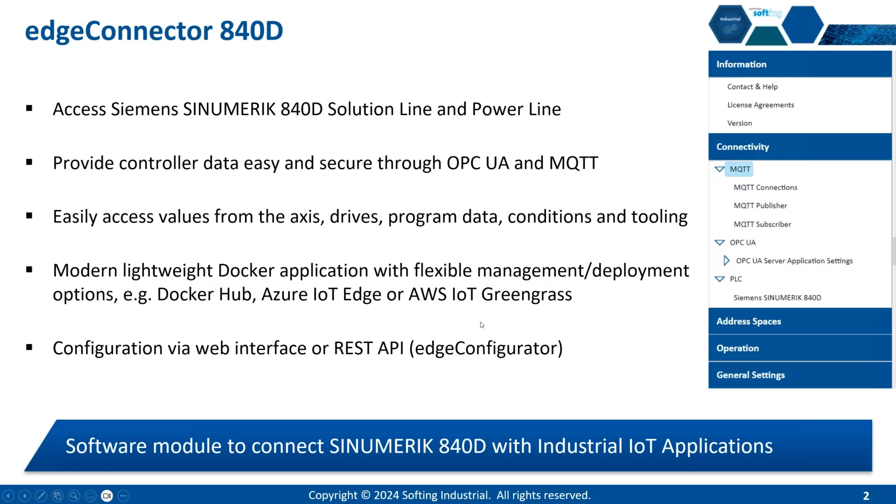Softing does not only have one edge connector, we have multiple edge connectors, each having a different source, like the Edge Connector Modbus, which is collecting data from Modbus PLCs. We also have one for Siemens, specifically designed for Siemens PLCs like S7 300 or 1500. And we also have one for FANUC CNCs. But as mentioned earlier, today we focus on the Edge Connector 840D, allowing you to access data from powerlines and from Sinumerik solution lines.

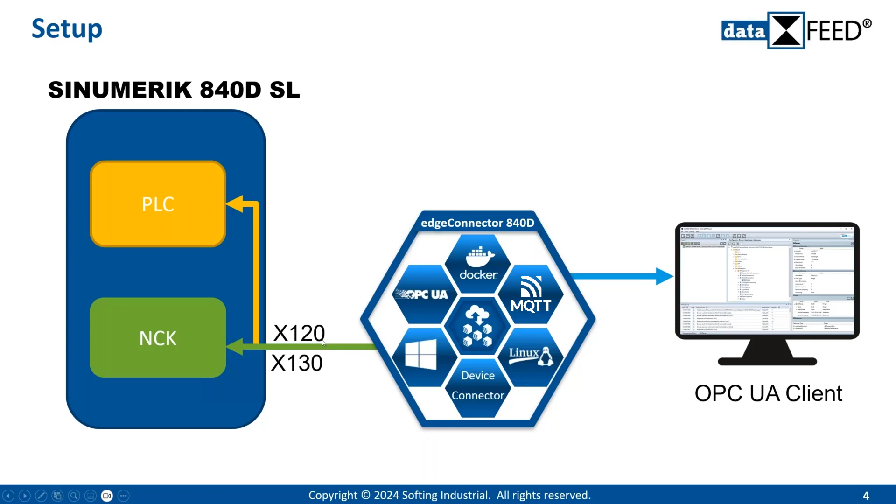Briefly, the setup explained. So you have the Edge Connector 840D in the middle, and by connecting to a Sinumerik solution line, which is the newer line from Siemens, you will have an Ethernet connection, and this is made via the interfaces X120, or you can also use the X130. If you use the X130 interface provided by the Sinumerik, please ensure that you enable the firewall port in the settings of the Sinumerik.

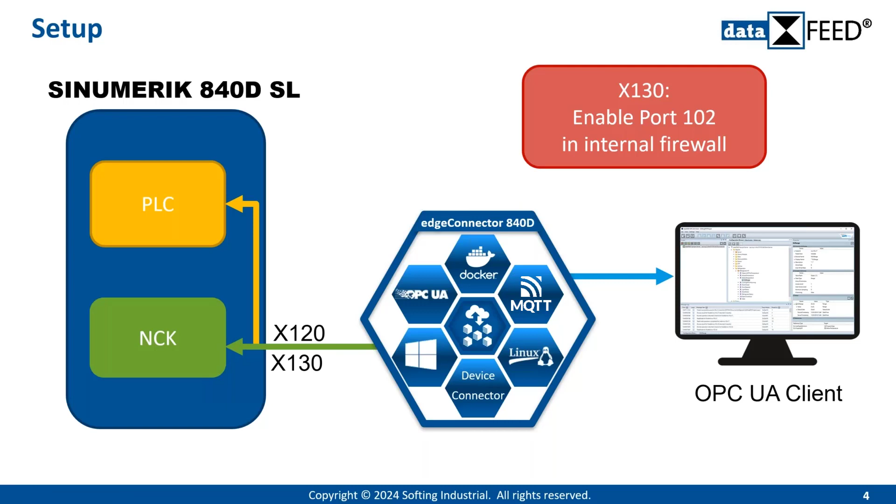This is how it looks in real life. So this is the X120, which I explained earlier, and this one is the X130. You can use both, but if you use X130, you need to enable the firewall. On the right side, you see a picture of it. X120 would be where the yellow cable is plugged in. X130 is where the white cable is plugged in.

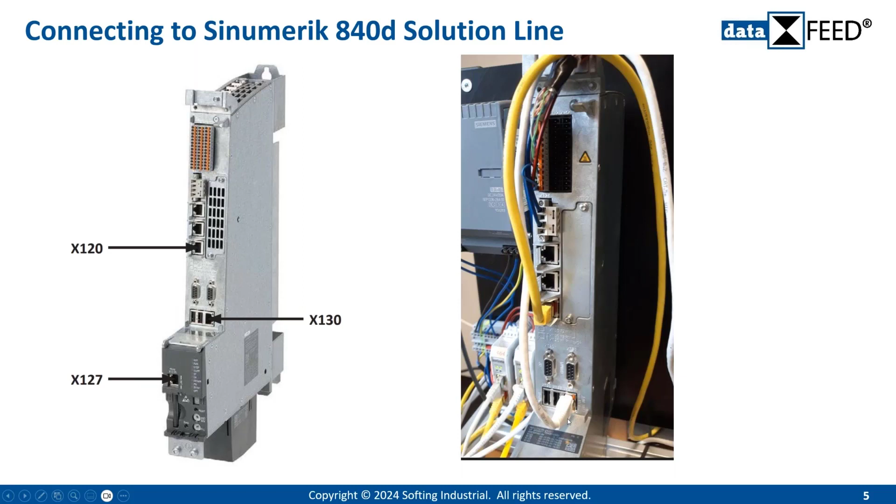When we speak about powerline, it is similar but not the same. Why? Because the powerline does not provide Ethernet. They just have serial bus communication because of the age of the powerline, which was mainly manufactured before 2005. So you need an adapter converting from serial to Ethernet. And Softing also provides a converter like this. This is called the NetLink. It converts MPI to Ethernet. To set up the NetLink, you just need to select the baud rate as 187.5 kilobits. That's pretty much it.

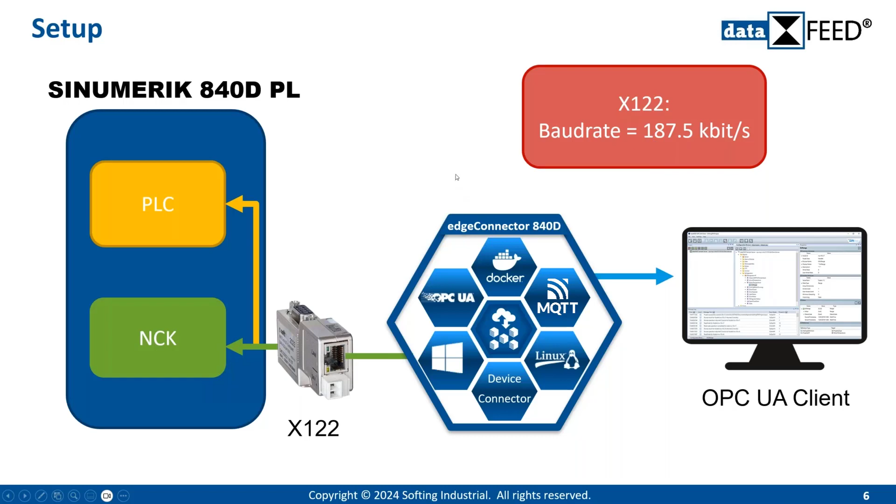The front panel of the powerline looks more or less always the same, but the X122, which we use for connecting to the powerline, is always on the same spot: it is right above the 8-digit display here. And once you have connected it, it looks like this. So you will also notice, as I mentioned earlier, there are no Ethernet communication slots here, so we need a converter from serial bus to Ethernet-based communication.

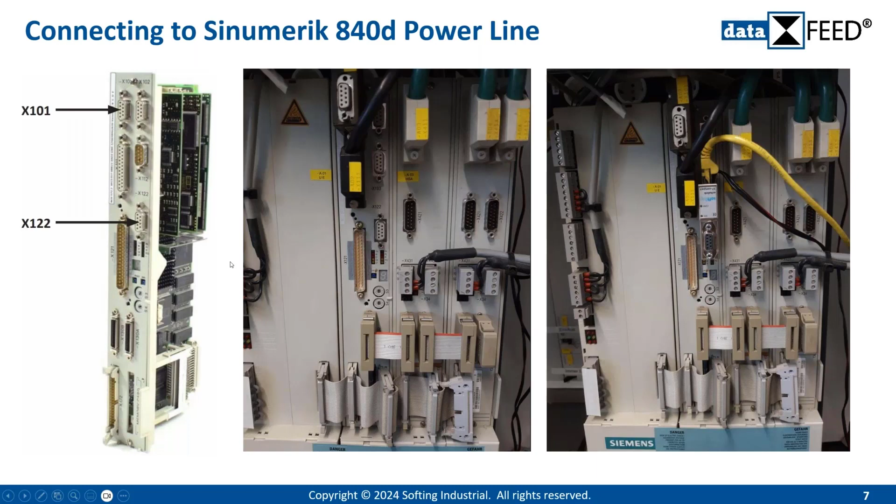How to collect the data? Maybe you know that the Sinumerik 840D, regardless of solution line or powerline, consists of two parts. There's one part called PLC, and there's another part, the NCK. Typically, customers want to access both. They want to have data from the PLC and also from the NCK. And we need to tell the Edge Connector 840D which data you want.

And this can be done via two different files. One is the SDFI file. This file is needed to access data in the PLC. And another text file, which has the naming AWL file. This is needed for accessing data in the NCK part.

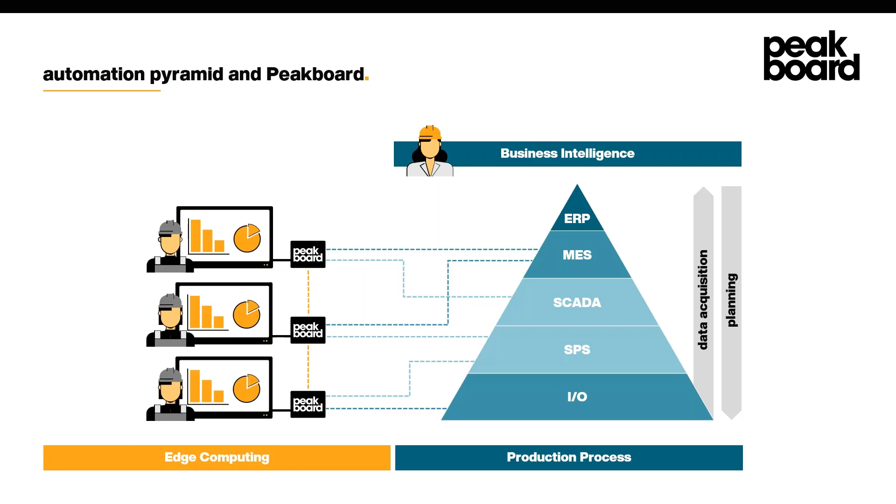This could, for example, be the edge connector from Softing, but this could also be, for example, an ERP system or whatever. And for that, we from PeakBoard can connect to all of the different data you have in your plant. So you can connect to your sensors, you can connect to your PLCs, SCADA systems, and so on. And when you did so, you can use our application to create, for example, a dashboarding or, what we can see here, a quality control.

So in that case, I just show you a small example of how people can collect quality data. Let's say they want to select which parts are broken and which parts are fine, to create data out of that, which makes you able to evaluate where you have problems, where you can improve. And that's what PeakBoard basically is. What we will do in a few minutes is to create this application. So we will create a dashboard overview where you can see the current state of your Sinumerik, but also how you can collect data from your workers to get an overview of your current situation in your plant.

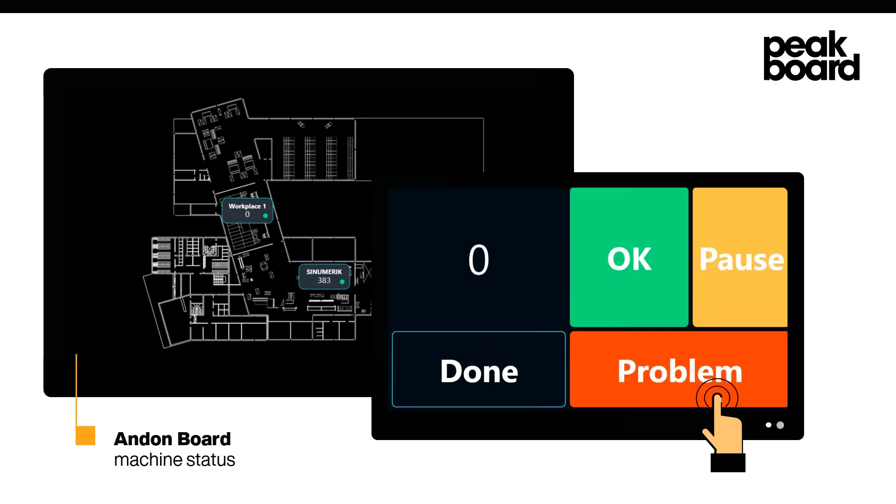For that, I will hand it over back to Stefan to start with the practical part. Thank you, Thilo. And I will start now with my practical part.

So I have already opened up my Edge browser, and I've entered the IP address and the port under which the Edge Connector 840D is running. I have to log in, and then I come to the landing page, giving me some useful information about the version installed and who I should contact if I need any help.

So the interesting part, because the time is limited, is the connectivity chapter, which is split again in MQTT and OPC UA. You can use both protocols, and for the connection made to the Sinumerik 840D, you simply enlarge the controller tab. And I will add a new connection to my Sinumerik 840D. I press this Add Connection button. I will give it a name like Solution Line.

And I want to establish connection to both, to the NCK part and to the PLC part. If you are happy with the default files, you can leave it as it is, but I have modified my NCK symbol file, and so you have to upload it. I simply choose file. I use that one specifically prepared for this webinar. I press open, and that's already it. Last thing I need to do is to enter the IP address of my Sinumerik, which is that one.

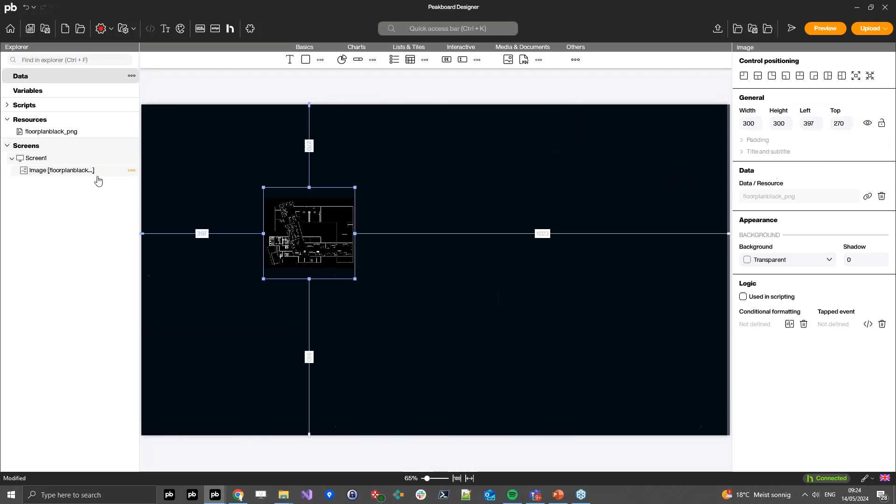And in our case, like shown before, we want to create this demo, this floor plan. So for that, I just start by adding the floor plan as a screenshot onto my Peakboard Designer. For that, I've just simply provided a PNG file, which I can just drag and drop from the File Explorer directly onto my screen. Click here on OK, and now I've just added a floor plan. So that's just where things start.

So the next thing I will do is first I will lock that so it doesn't annoy me anymore. I cannot click it now anymore. And the next thing I will do is now to connect to the OPC UA server Stefan provided from his Edge connector to get this Sinumerik data.

So for that, I firstly click here on data, add data source, and like you can see here from Peakboard, you can connect to a lot of different data sources, starting from REST APIs like JSON, XML. You can get data from SAP, databases, whatever, or different machine data, like for example here we have OPC UA. OPC UA is just the thing we want to use now.

So let's start with that, and first I give that thing a name, and we call this Sin1 for Sinumerik 1. This is the first of our Sinumerik machines, and firstly I will enter here the URL of our OPC UA demo server. Let's click here on endpoint reload. So like Stefan showed before, we have no authentication set, so I can just select anonymous. However, I need to select some kind of certificate. I can directly create it here, but I already did that.

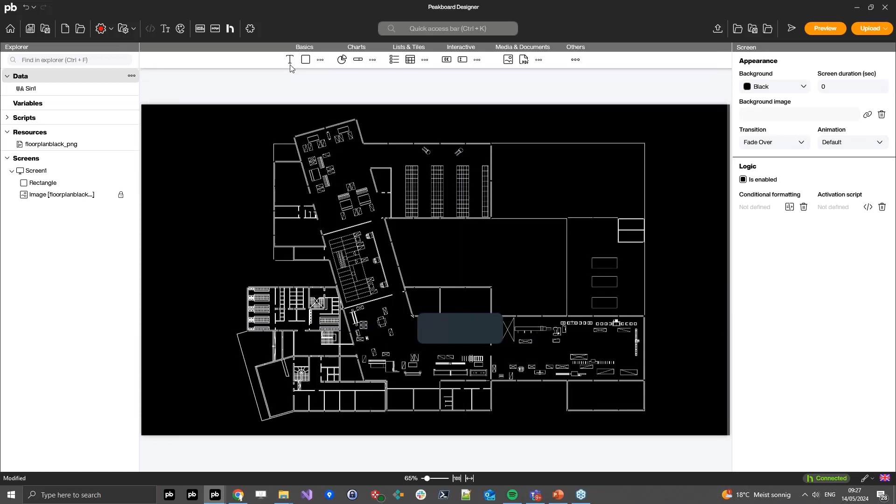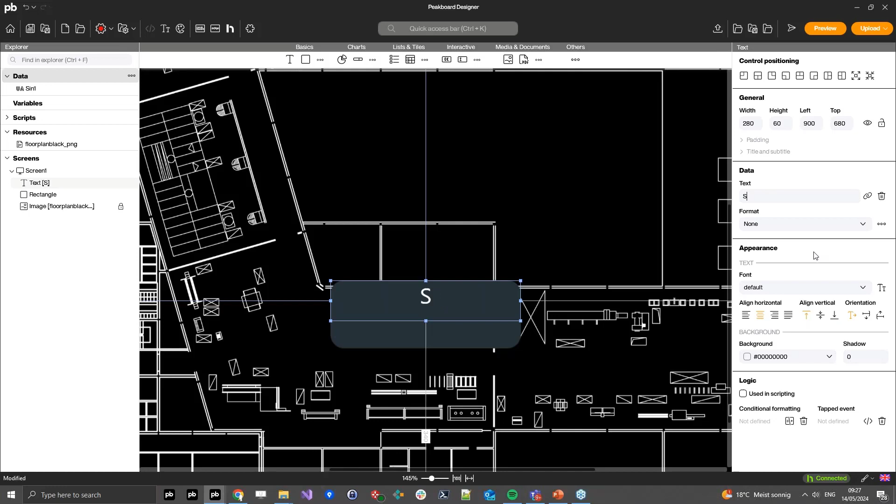So the next thing then is that I add a header for the Sinumerik. So for that, I just drag here from the top. Oops, I double click onto the rectangle, and I will just simply set the visual settings, like for example the position. I will call it Sinumerik, and just set the font here to header 2 in that case, and make it a little bit smaller because it's pretty big here, and let's have it like that.

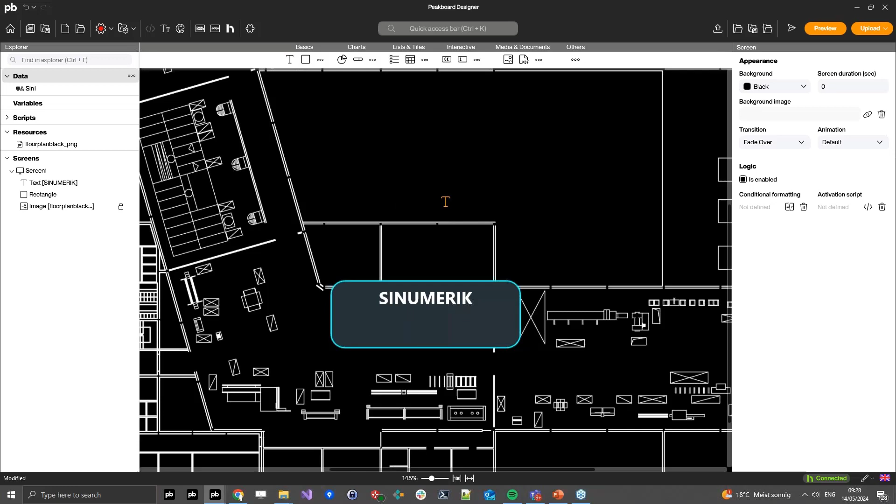So then, to beautify a little bit, give it a border and set it here. And the next thing I want to do is show the counter. So like Stefan showed, we have this workpiece counter from OPC UA, and I want to show the number of the parts created from the CNC machine.

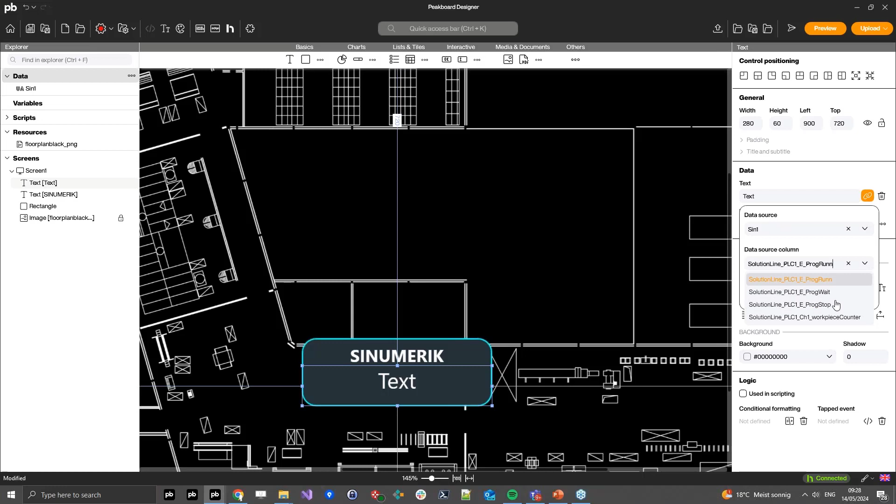For that, I add here another text field. Also, I center that one. And in that case, I just connect that to my data source I've created before. So in that case, this is the only data source I have. It's this Sin1. And I want to have the workpiece counter, which delivers me the amount of produced parts.

Let's do another thing. We want to show here how the current state is of the machine. So if it's running or if it's waiting or has an error. So for that, I just add here such a small little ellipse. I set it by default to green, and if some things happen, then I will change the color of it. So for that, I just go here to this element, and here I have this property called conditional formatting, where I can create such kind of rules.

Let me just start with the first one, and let's call this running. And in that case, I say if the Sinumerik is delivering me a true for the Boolean program running, then I want to set the color to green. Let's do the same for idle. So let's say it's stopped, but a planned stop. So then we have this program wait on true, and in that case, I will just want to set

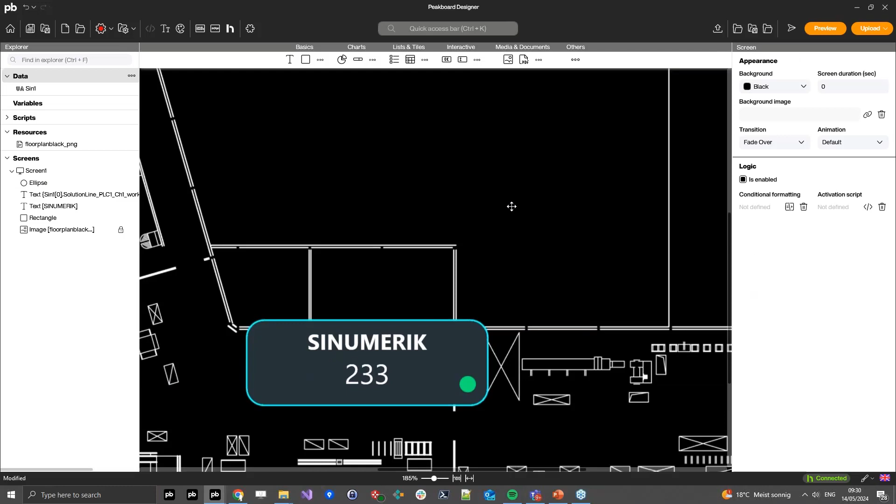it to yellow. And let's add one more, and let's call this error. And in that case, I get a Boolean true from the stop. And in that case, I want to set this color to red. So that's basically all I need to do here. But let's do one more thing.

So let's say we don't have just the Sinumerik data, but also we have a workplace where some manual people are working, and they also should be able to deliver different states and parts. So let me just do one other thing, and here I will create two variables manually. The first one I will call workplace 1 pieces. And this one should be of type number, and by default it's 0.

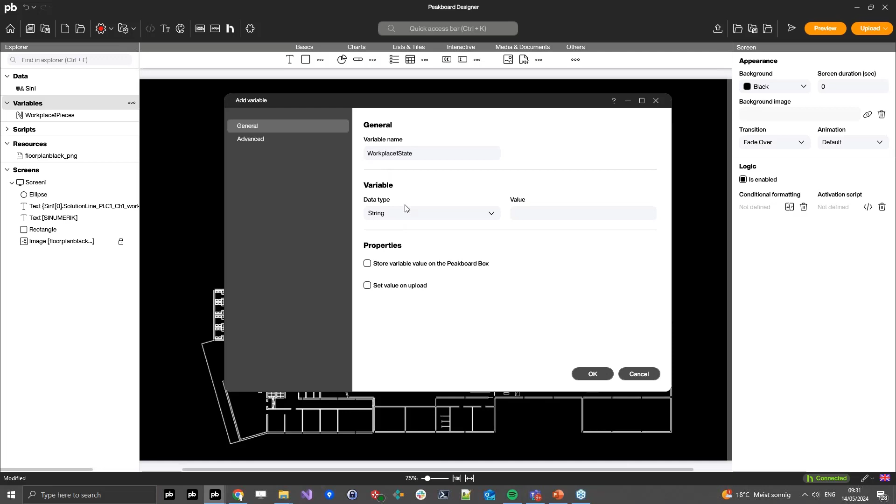And I go here to advanced, and I click here on this share with Peakboard Hub, where I can give it an identifier to later connect it to other applications. So let's call this workplace 1 pieces. Click on OK. Let's just do exactly the same again for the state. So this one I will just call workplace 1 state, and do the same thing here just for state.

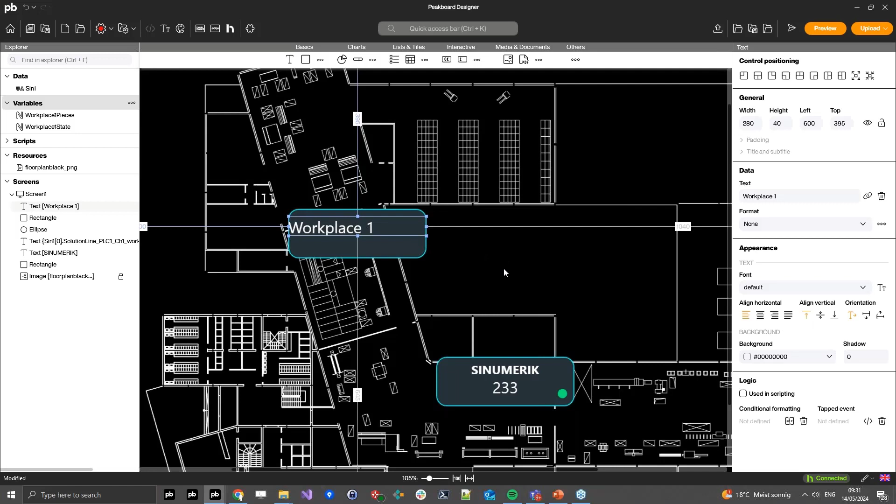So that's basically it, and we can now do the same thing like we did before. Just add here another one for the workplace. I will add another text here on top, and here I just call it workplace 1, and center this thing here again and set the font to the corresponding font. And in that case, I want to have another text on the bottom of this field. In that case, I want to show the pieces created manually on this workplace here.

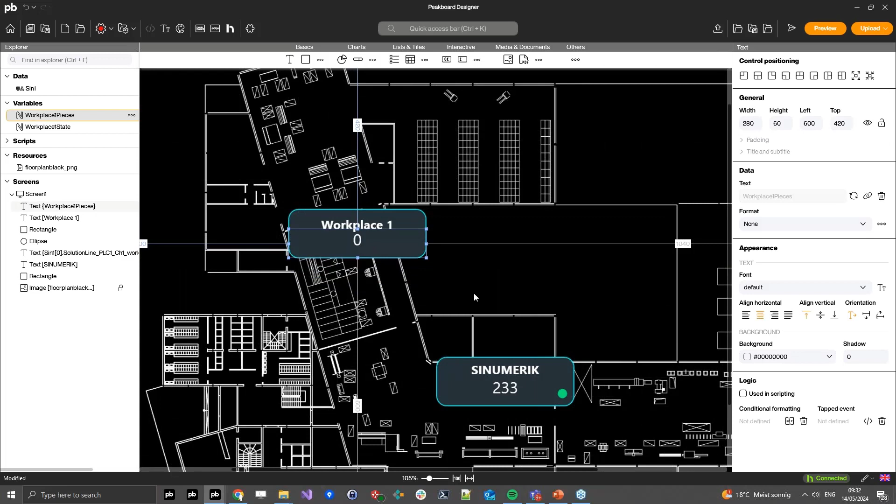So again, I will just center it and add another ellipse here on the bottom right. So it's just doing exactly the same later like the other one. So let's move that one here to the bottom right of that part. Click it, and let's set the color to green again. And in that case, I go back to this conditional formatting, where I just add these 3 different states.

In that case, it's just that one, and we've defined that if it's 0, then everything is fine, and if it's 1, everything is fine, and if this state is 2, then we have an idle, so the worker has just paused or something, and then we also have an error state here. I call this error, and go again here, and let's say this one is now 3, then I want to set this color to red.

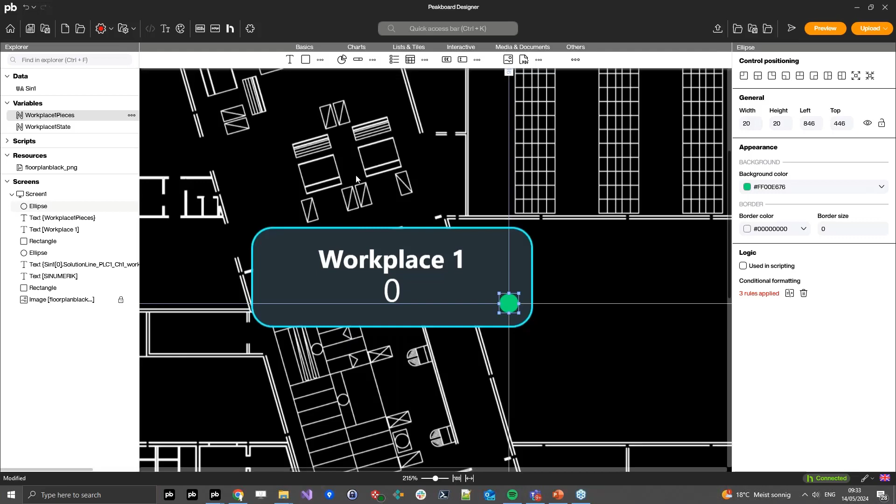So, to make this part also done, we already get the data from the OPC UA for that part, but for that part we need to collect the data somehow. So for that, I've already created a small other dashboard before, just like that. So in that case, I again have 2 variables connected to the other ones by just setting this identifier. In that case, it's the workplace 1 state, and oh no, I just did it for the wrong one, for the pieces, and the same one for the state.

And now I've connected these variables with the other dashboard. And here on these buttons, let's just open one of them. I just changed the values of the, okay, I've set it to 1. So let's just change it shortly. So when you click here on one of the buttons, this script is running.

In that case, it's not really a script. You just can use our puzzle system, what we call building blocks, where we just set these different values. And we have one other thing. When you click here on done, then we count up this number, how many parts are created. We count it up by 1 by setting this variable to itself plus 1. And that's basically all we need to do here.

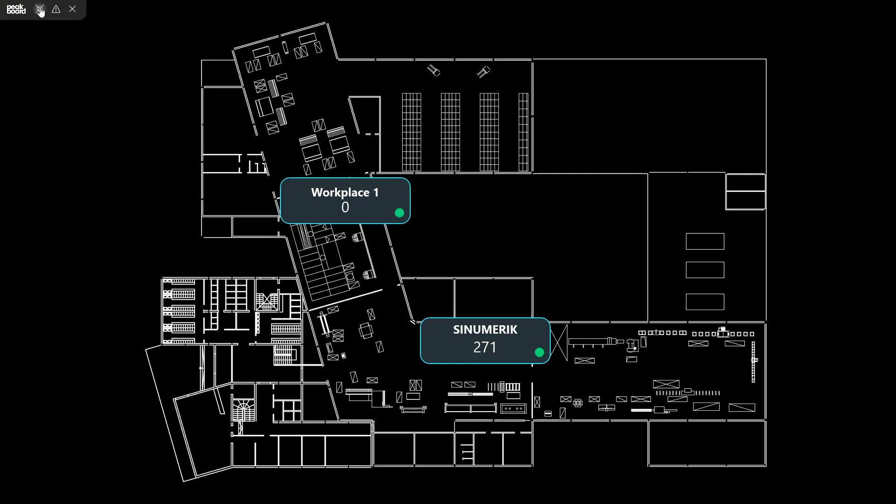So we will now directly connect to the data from the CNC machine, getting the data here, counting up the numbers, and also I have here this manual workplace where I can directly interact with the dashboard to get an overview of the whole floor plan. To upload the current version. So by clicking here on this done part, I can just count it up or set here the problem. So now you directly can see where problems are happening. You can reduce your downtimes by reacting faster and get an overview of your plant.

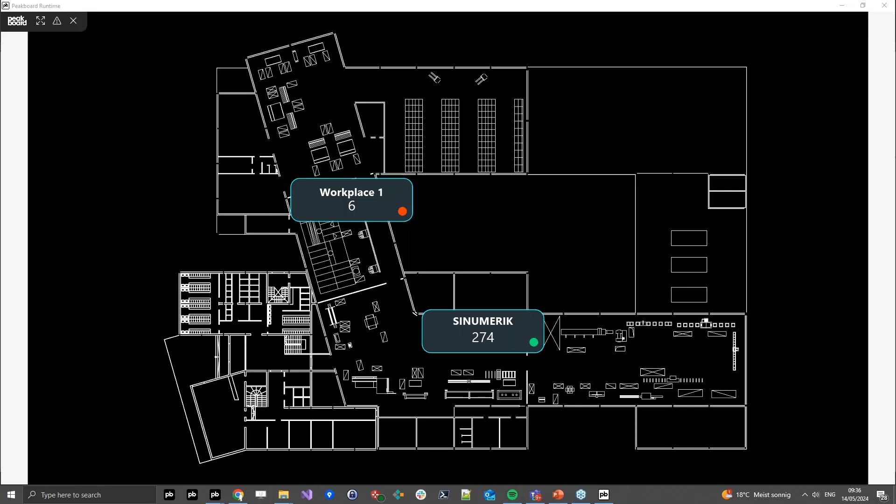Okay, here's one for you, Stefan: how can I test your software? Is there any way to try it out before? I think I didn't mention it. So you can download the Edge Connector 840D for free. It is available on Docker Hub or also on Microsoft Azure, whatever you prefer. And it comes with a 72 hours demo mode. So you don't have to buy it straight away. Download it, test it for 72 hours. And after 72 hours, you can restart the application and it will run again for 72 hours.

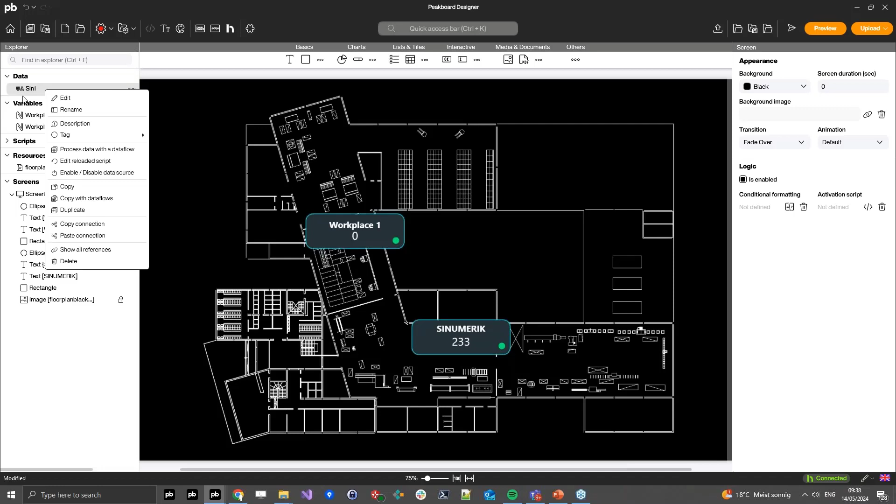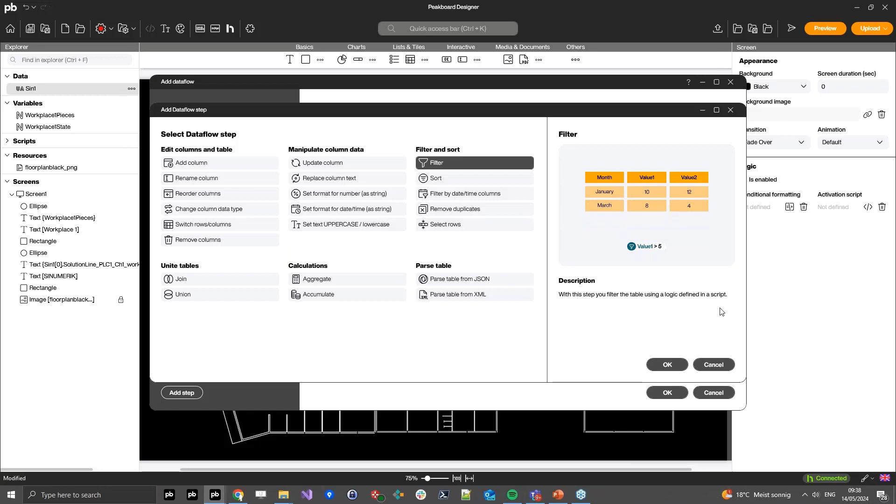Okay, great. Thanks, Stefan. And I have one question, which I think would be for Thilo. Can I also clean the data in case I want to aggregate them or something similar to that? That's a good question. It's very common that you don't get the data as you want to have them. So in that case, we provide something we call data flows. You can simply click on a data source you've created, click here on process data with a data flow, where you have the possibility to, for example, filter the data, sort the data, aggregate them, or process the data however you want. So it's really made simple to process your data so you can get it as you want.

Great. Then I have a question from Gerald Steinkellner. How fast can I collect data from the CNC? Yeah, I don't have a concrete answer to this because it depends. It depends what data you want to collect, how much data you want to collect, and from which machine. Is it a Solution Line? Is it a Power Line? So it varies between, let's say, 10 milliseconds to 80 milliseconds. That's the range. Please contact us and we can discuss it in more detail. But that's just to give you an indication.